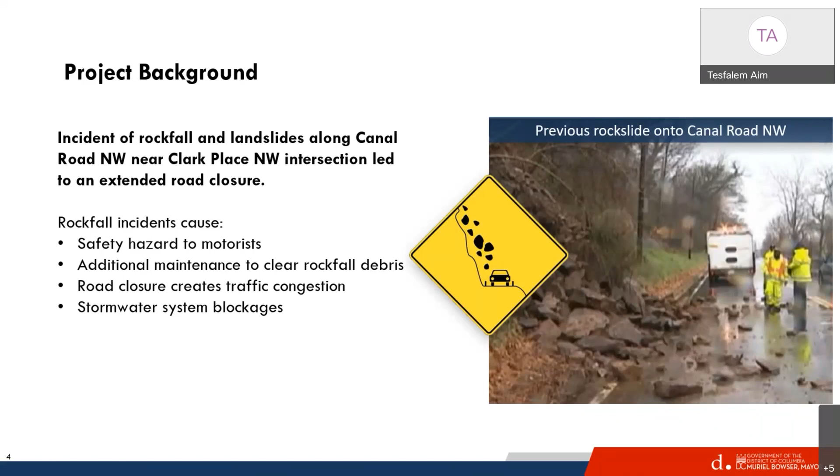Next slide, please. As you can see, even here, those rockfalls are a hazard to commuters who use Canal Road Northwest. DDOT is committed to improving transportation safety and creating safe streets, and this incident initiated the geotechnical study of Canal Road Northwest. The preliminary study assessed potential rockfall hazard areas and recommended a mitigation measure. Based on this recommendation, DDOT embarked on this project to stabilize the slope and mitigate the safety hazard and safety concern along this section of Canal Road Northwest.

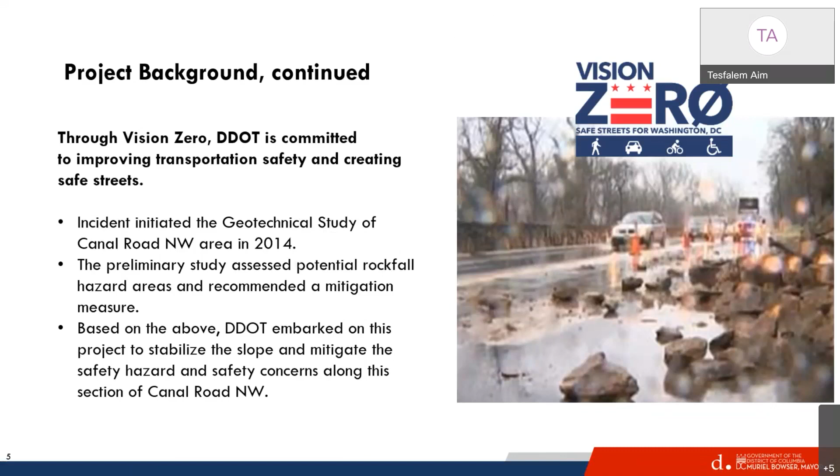As Tess mentioned, the project began back in 2014 with an earlier geotechnical study. This project has two very important goals: one, to find a mitigation measure to address the slope failure issues, and also considering the costs and impacts to the public. As Tess mentioned, with a slope failure, the road becomes a large impact.

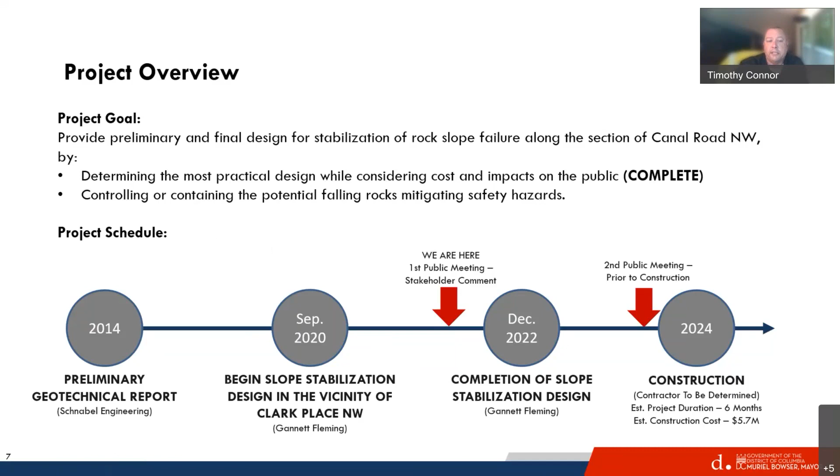We have several key stakeholders within the project area. Most of the property along the slope is owned by and maintained by the National Park Service. The District of Columbia, obviously DDOT, is a contributing stakeholder here. They are actually procuring the slope stabilization project, and they will also be ensuring work zone traffic flow is maintained during construction.

Property owners, again, with this project being not only in a commuter corridor but also adjacent to residential properties, are major stakeholders here. There will be slight impacts to not only the walking trail but with some construction noise, and the construction detours will obviously impact traffic for a short period.

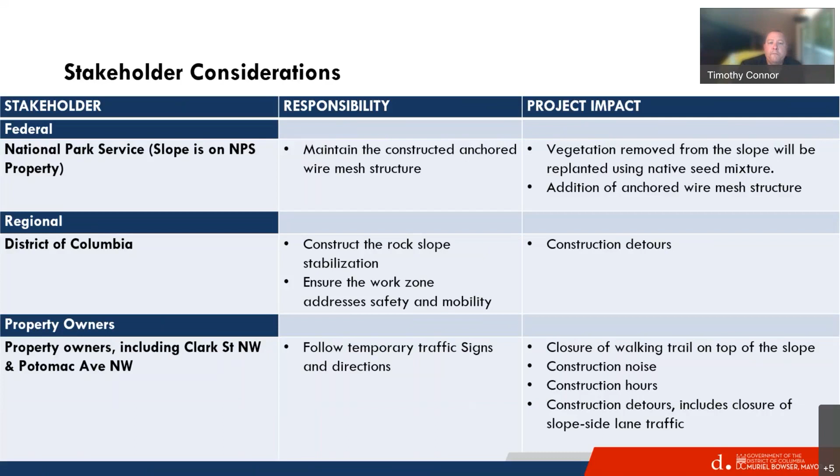Matt, I'll turn it over to you to talk about some of the alternatives we've looked at. Okay, thank you, Tim. I'm going to basically walk through three alternatives that were considered.

All of these alternatives have one thing in common: they prevent rocks or landslide debris from reaching Canal Road and creating the impacts Tess mentioned before, road closures, public safety hazards to drivers, as well as impacts to the stormwater management system at the toe of the slope. These are grouped into three alternatives.

The anchored wire mesh is a reinforcement measure, and reinforcement measures actively stabilize the slope and also prevent rockfall from reaching Canal Road. Whereas alternatives 2 and 3, a slope drape or a rockfall barrier, are considered protection measures in that they protect Canal Road from rockfall or landslide debris coming down onto the road. However, they do not actively stabilize the slope between the road and the top of the slope, the trail.

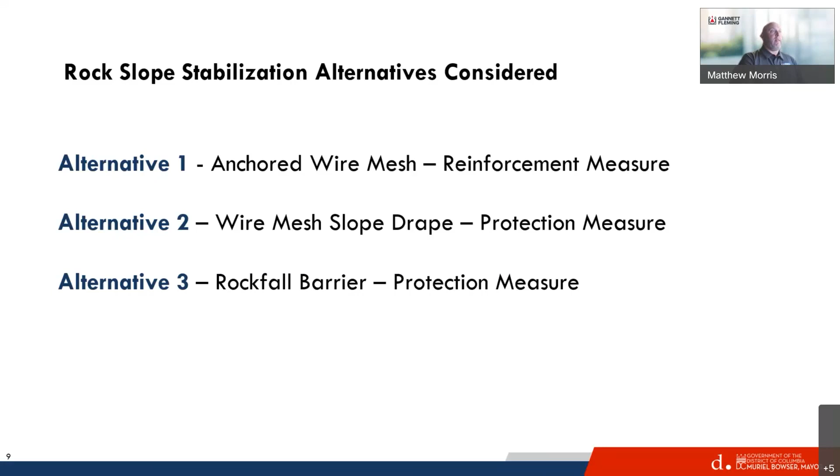So I'm going to take a few minutes and walk through each of the alternatives, give a description of them, provide some pictures and schematics so everyone can understand what we looked at, and then we'll move into the selected alternative and discuss that. Slide, Tim.

Slope stabilization alternative 1 is an anchored wire mesh system. You can see in the pictures on the right basically what this consists of. Following those photos top to bottom: that's an unstable slope where the soil and rock had been sloughing off. The second picture shows a grayish high tensile strength wire mesh installed on the slope and pinned down with rock anchors. The third picture is the completed project with vegetation coming back through.

This is an active system in that we are stabilizing the slope as well as preventing debris from coming onto the road. It does require removal of trees and brush from the slope. Larger trees, select high value trees, can be kept, and the mesh can be positioned around those. Ultimately, the rock and debris that wants to fall down is held in place by this anchored mesh system.

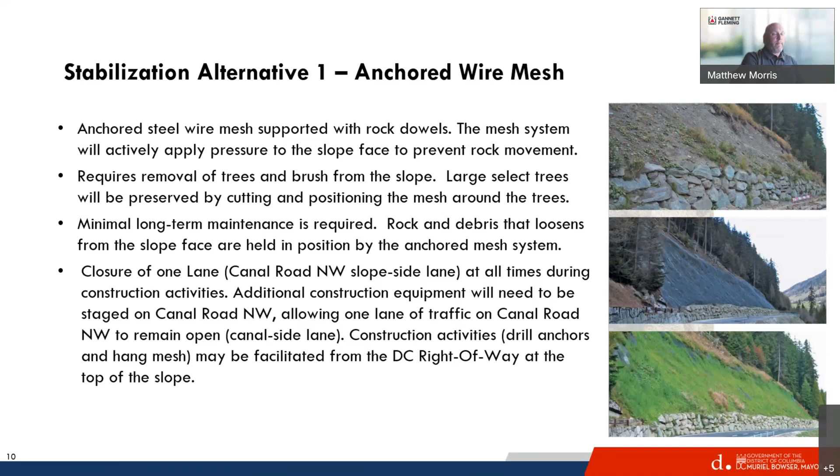The installation of the system requires closure of that slope-side lane so that the anchors can be drilled, the mesh can be placed, the clearing can be done, and loose rock removed from the slope during construction. But all of these activities can be facilitated from within the District of Columbia right-of-way, both at the toe and top of the slope, and on the National Park Service property, the slope proper.

So this is a schematic, and the image on the left side of your screen is a cross section looking east along Canal Road. Canal Road is the flat area at the bottom of the image, and the trail is the flatter area at the top. You can see there's around 55 feet of vertical exposure that comprises the slope face, and it's a mixture of soil, rock, and weathered rock.

The anchored mesh system would be installed from the flat area at the top, basically the crown of the slope, the entire way down to the toe, just a few feet above the roadway surface. It's anchored down with large steel anchors grouted into holes, basically 10 to 20 feet long, that anchor the mesh down and hold everything in place. Think of it like a pin cushion effect, holding the mesh down and trapping everything behind it.

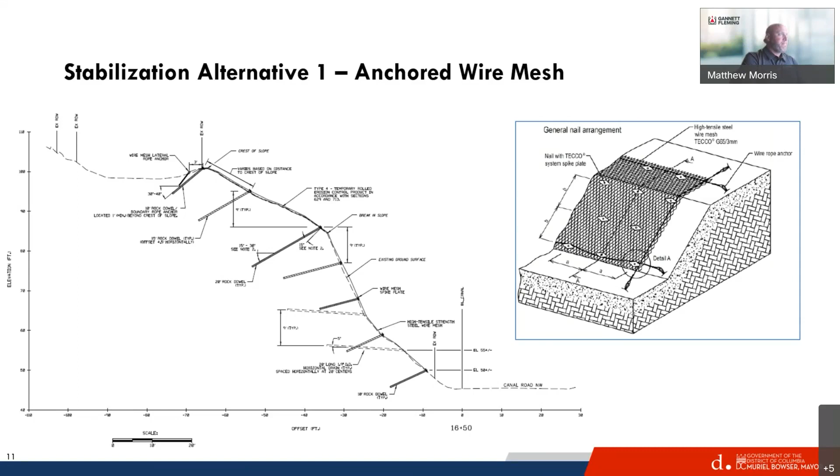Slope stabilization alternative 2 is a wire mesh slope drape. Again, this is a protective measure in that it controls the rock and soil that wants to fall off the slope and traps it underneath while it's falling, slowing it down and depositing it at the toe of the slope.

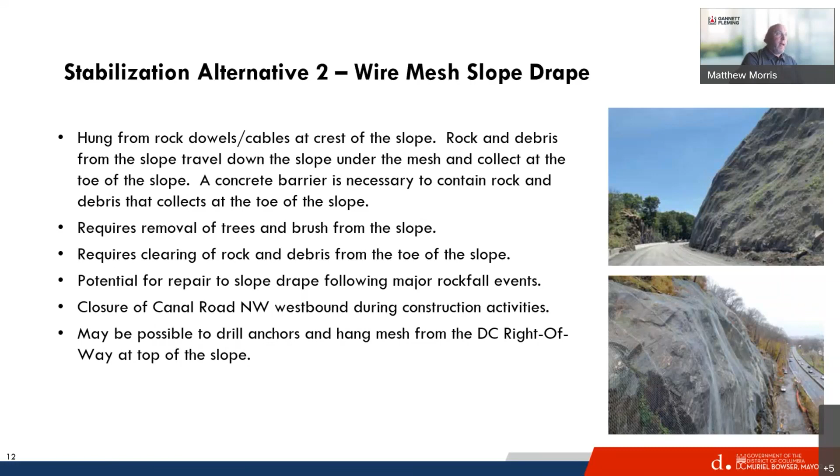At the bottom of the slope, we would need a concrete barrier to retain this material so it didn't spill into the road, requiring regular maintenance to keep that area clean so debris didn't pile up behind the barrier. It also requires removal of trees and brush from the slope. If there's a major rockfall event, the mesh could be damaged and require repair. Again, this would require closure of the slope-side westbound lane during construction. The anchors would be drilled along the top of the slope, along the trail, similar to the anchored mesh, anchoring from the edge of the slope down to the toe.

Here's the schematic on the left, a similar cross section showing where the mesh would start at the top and extend down to the toe of the slope. The concrete barrier is shown just above the 21+00 indicator. The schematic on the right shows how the mesh controls rockfall coming down, which then falls into that 'run out zone' at the bottom. Since we don't have a ditch like that, the barrier is in place to help control that material and keep it there until it can be cleaned out, preventing it from reaching the road.

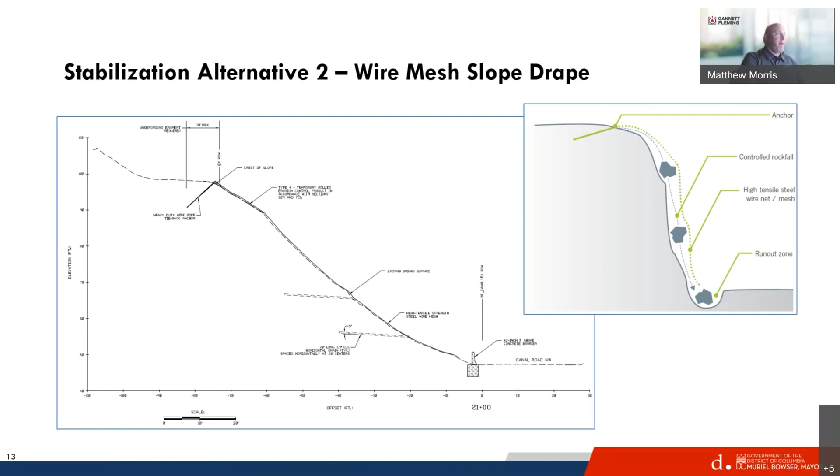Stabilization alternative 3 that was considered was a rockfall barrier. The image on the right shows a barrier along a roadway in central Pennsylvania in the mountains. This is a steel barrier constructed between the toe of the slope and the roadway itself, and you would need a concrete barrier or guide rail in front of it to prevent traffic from hitting it if they came off the road. This one is unique in that it doesn't require any construction on the slope face or top of the slope at all. However, it would require regular maintenance and cleaning of debris from behind the barrier.

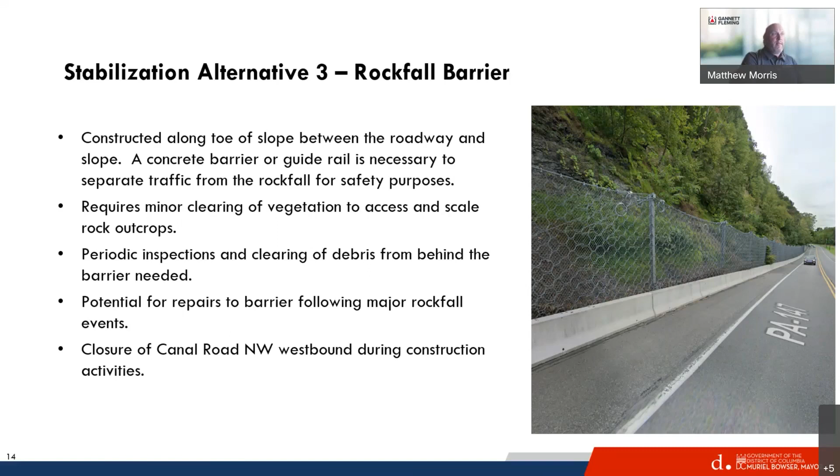Potentially major repairs following a major rockfall event would need to occur there. You would still be closing the slope side, the westbound lane of Canal Road, during the construction activity so that this could be constructed, drainage improvements could be made, and ultimately the concrete barrier or guide rail could be placed in front of it.

So this is how that barrier would be positioned at the toe of the slope. You can see there's nothing on the slope itself here. The barrier would be anchored down at the toe behind a concrete barrier, and the image on the right is an oblique image of what this would look like.

What happens is you install a series of posts on about a 25 to 30 foot spacing along the toe of the slope. You put up very high strength wire mesh along those posts with some cables, and any blocks that come down and impact that are trapped behind the barrier.

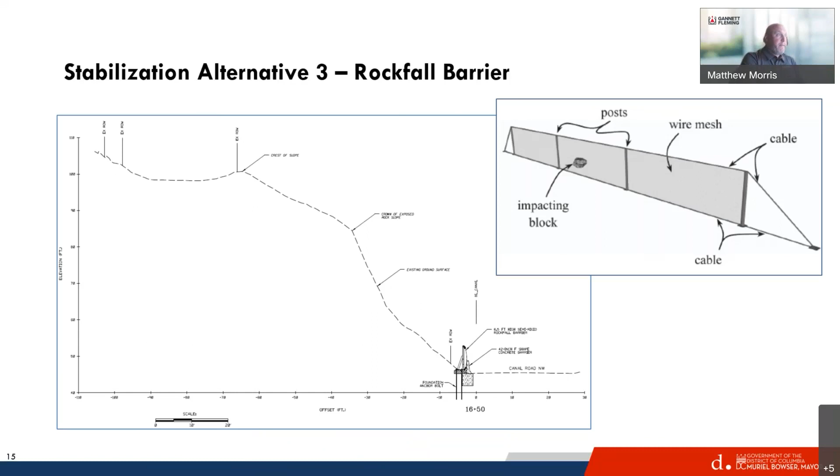So we considered these three different alternatives. We discussed with DDOT and the National Park Service all of the alternatives we considered, the pros and cons of each, the aesthetics of each, and the finished product and what provides the best solution. The anchored wire mesh alternative number one was the selected alternate to move forward in design.

The biggest advantages are that from a cost benefit solution, it provides the most. It stabilizes the slope in place and prevents rock from coming down the slope. When we talk about stabilizing the slope in place, why that's important is that as landslides continue to occur and as rockfall occurs, the top portion of the slope continues to get undermined. As that's undermined, we start to lose real estate, that flat area at the top for recreational purposes, the trail.

This system is generally maintenance free, meaning that neither DDOT nor the Park Service needs to come along the toe of the slope following an event and clean it out, as would be the case with the slope drape or the rockfall barrier fence. It is aesthetically pleasing. Basically, once it's been installed, you won't see it because it'll grow vegetation back through it, and I'll show some examples of that.

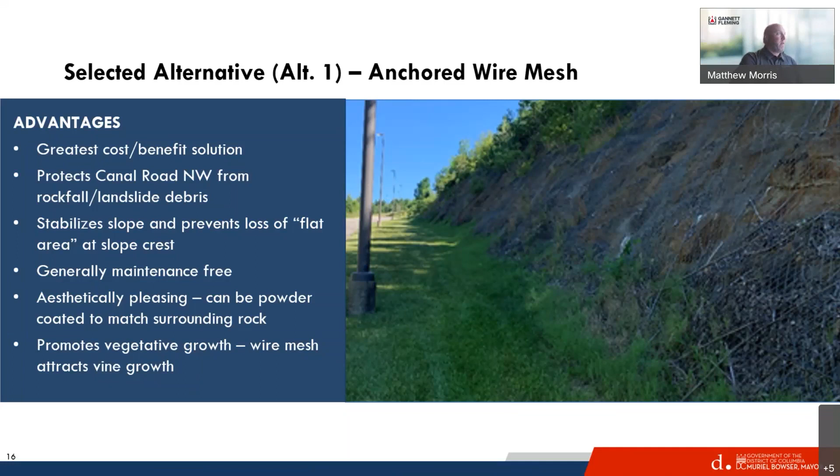The construction process behind installing something like this - this photograph you're seeing is a slope also in Pennsylvania that was done, back in, I think, 2006. A similar situation: you have a 2-lane roadway with lots of rockfall issues. You can see the overhangs there. The rock bolts were installed.

The way the process works is you remove the vegetation and get rid of all the loose rock blocks that are precariously on the slope after the vegetation's been removed. Then you install the rock anchor dowels. That's a picture of one of the dowels right there, and you can see those throughout the image at different places on the slope. There's a pattern to them, typically around a 12-foot to 15-foot horizontal and vertical spacing.

So those dowels are drilled in. You drill a hole, insert a steel bar, and fill it with cement grout. Then you place seed and turf reinforcement mat on the flatter portions of the slope. In that image, at the crown of the slope, you can see some pretty green vegetation growing up there already immediately after construction. That seeding will be done with native seed material per the National Park Service request.

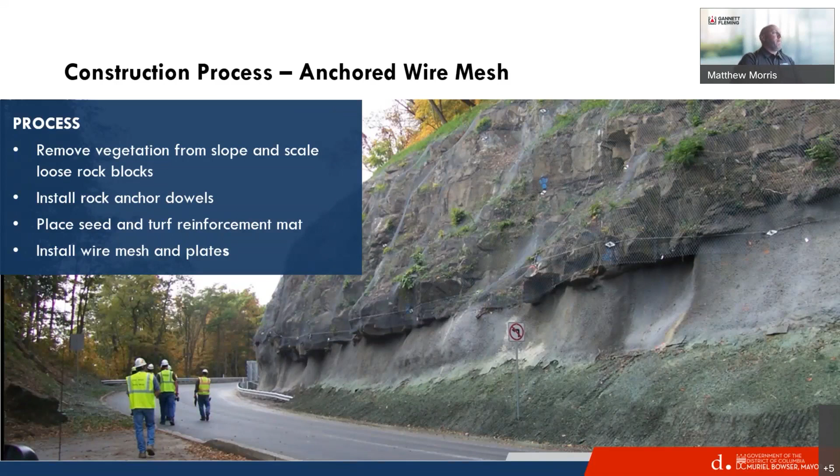This is that same slope, same exact place, a few years after construction. You can see vegetation growing on the slope, with a little mesh exposed in the steepest areas where rock was exposed, but even areas without seeding or vegetation mat have revegetated completely at this point. The rockfall mitigation is working fine, we're not getting rockfall coming down, and the toe of the slope is vegetated as well.

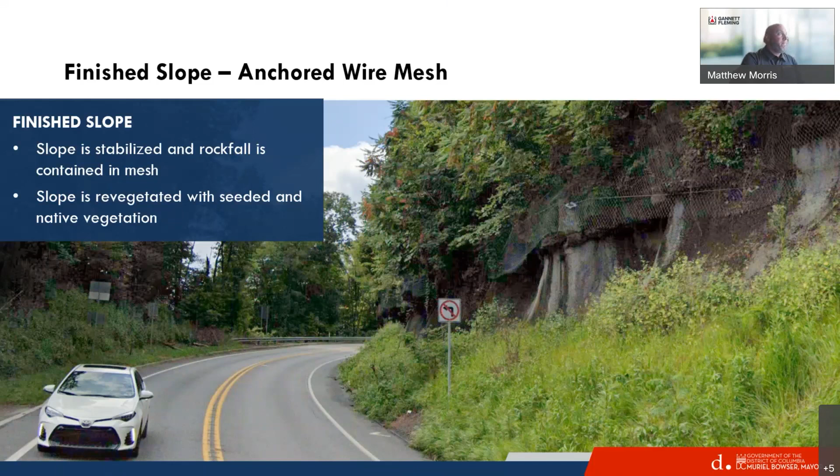I think I'm turning it back over to Tim to discuss drainage along the toe of the slope.

As part of the improvements to this area of Canal Road, we are installing an upgraded drainage system that will address water coming down from Potomac Avenue over the slope, as well as ponding and water issues currently experienced along Canal Road. The first item is tying into an existing inlet at the top of the slope, which will have a pipe coming down into a new inlet. This ties into the existing drainage system to the west of Clark Place.

We're also installing new inlets and pipe connections within the area. On the east side of Clark Place, we're installing a new system that will tie into the existing system as you go down towards the Foxhall MacArthur Boulevard intersection, with new inlets and pipes to address low point ponding areas currently on Canal Road.

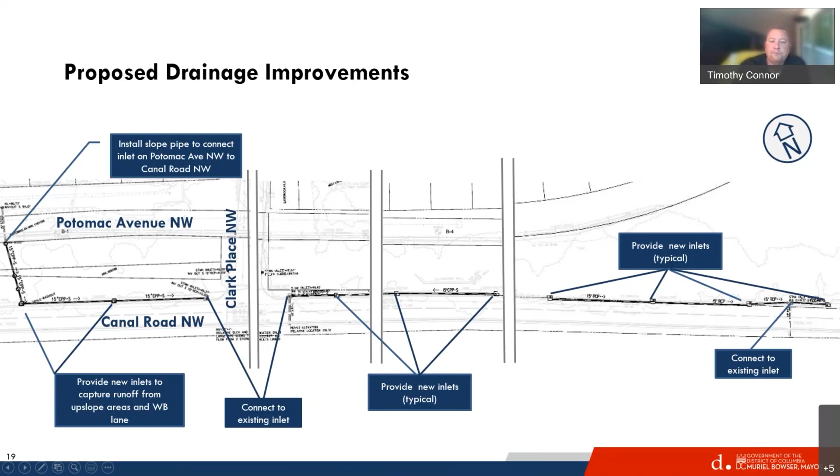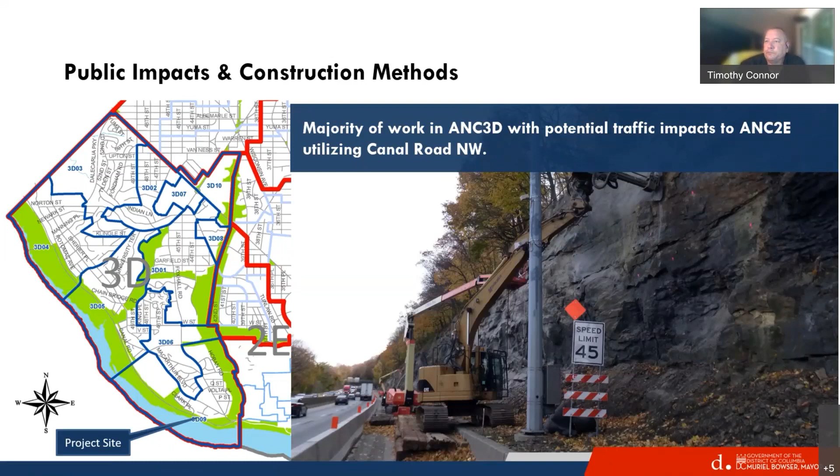Currently we are looking at how this project will impact traffic flow. We're considering a single lane detour, trying to keep one lane open along the canal side of the road. The detour would follow peak direction traffic, utilizing MacArthur Boulevard through Foxhall up to the Arizona intersection, then down Arizona back to Canal Road.

The alternate is the George Washington Parkway. After several days of sitting in traffic, things will even out and people will divert, likely either to the George Washington Parkway or other roadways, and also utilize the designated detour.

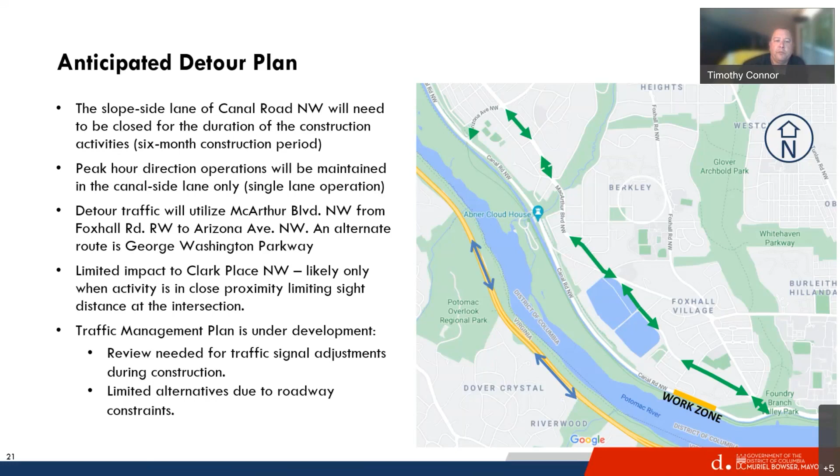We're currently developing a traffic management plan, closely coordinating with DDOT traffic, and looking at the key intersections along the detour route. There are limited alternatives given the location of this project, so the detour seems to be the preferred or more likely alternative, but we are exploring other options. Depending on impacts to various intersections, we'll determine the best alternative, closely coordinated as we get closer to construction.

This shows our current plan for the peak hour detour. The slope side travel lane would be closed for the duration of the project, anticipated to be about 6 months. The canal side lane would remain open in the peak hour direction depending on time of day. We're looking at just one-directional flow during construction, not allowing two-way as is currently allowed midday or overnight; we want to keep it single direction. Currently the timing is from 12 midnight to 12 noon, though depending on traffic flows and overall needs, those times could change, but they will remain directional.

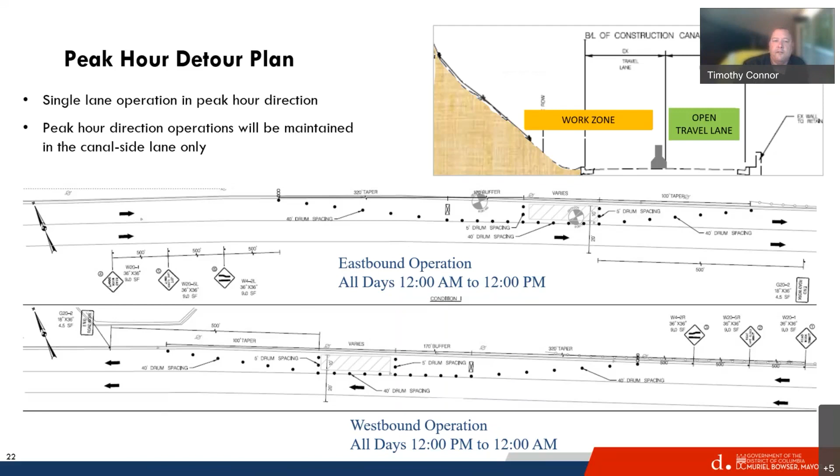And that is the end of our information on the design. Karyn?

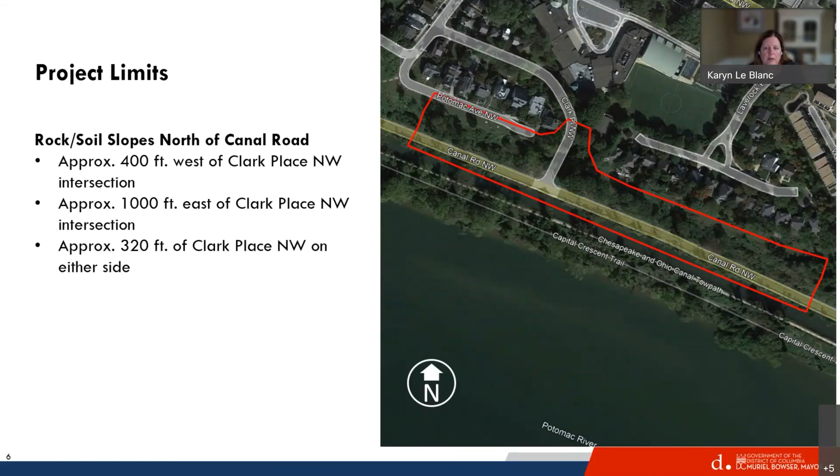Okay, thanks. We do have two questions regarding trees. The first is, do you know what kind of new trees will be planted on the slope? And secondly, if new trees will be planted, where on the hillside slope would they be and how tall?

Yeah, I can handle this one, Karyn. No, we would not be planting new trees on the slope. The wire mesh that's going to be in place will prevent large trees from growing on the slope. So what we plan to do is consult with the National Park Service and identify a good seed mixture that has native, low elevation growth seeds, mostly grasses and/or native vines, that would be planted on the slope. Large trees that grow large, we couldn't do that because the anchored wire mesh will not allow them to grow through the mesh itself. There may be some medium-sized trees, non-native or native species that just happen to take hold, but active tree planting will not be done on the slope.

Okay, great. That is all the questions I see, both in the chat and in the Q&A. I think that's it. I don't believe we have any other further questions.